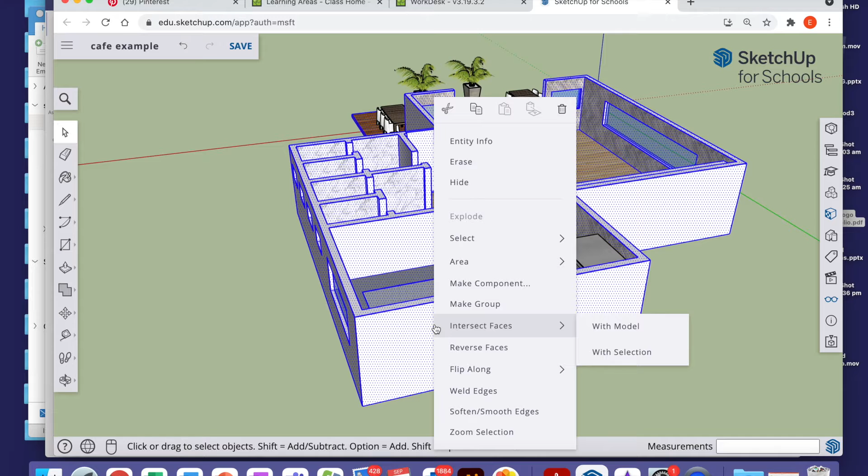Use the arrow, triple click on your model until it is all in blue. Right click, make group. This way, once we do the doors, if we happen to make a mistake, we won't affect our model. If we need to edit the model, select it, right click and explode.

And that way, while something is grouped, you can't actually adjust it. So if you're actually drawing shapes onto a shape that isn't grouped, they'll join together in SketchUp. In this case, it will remain separate.

What you can do now is actually draw a box on the floor, drag it up. This is going to be our door shape, like a 2400.

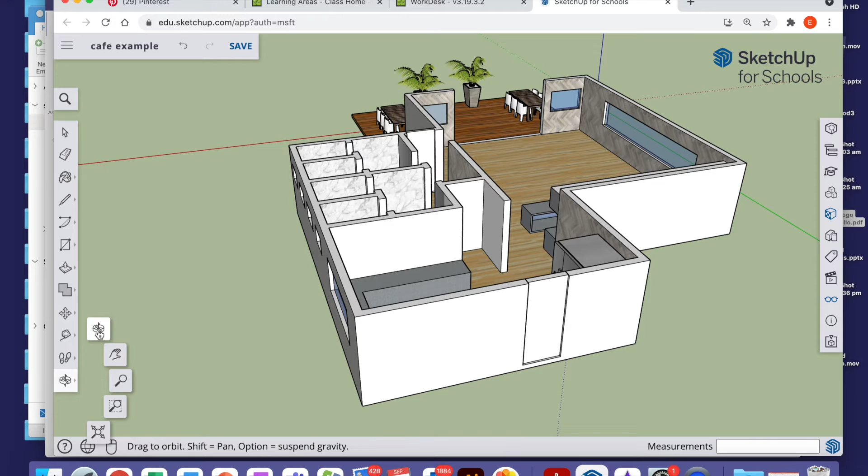I'm going to push it in about 50, rotate it around and push it in at 50 on the other side using the push-pull tool. That way it should be 100 mil thick.

We can then colour it depending on what door colour we would like. Get any colour that you like, a nice beachy blue.

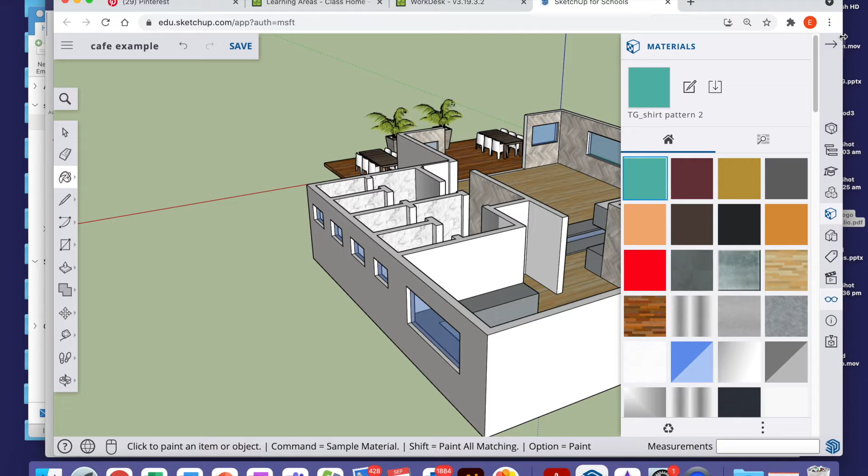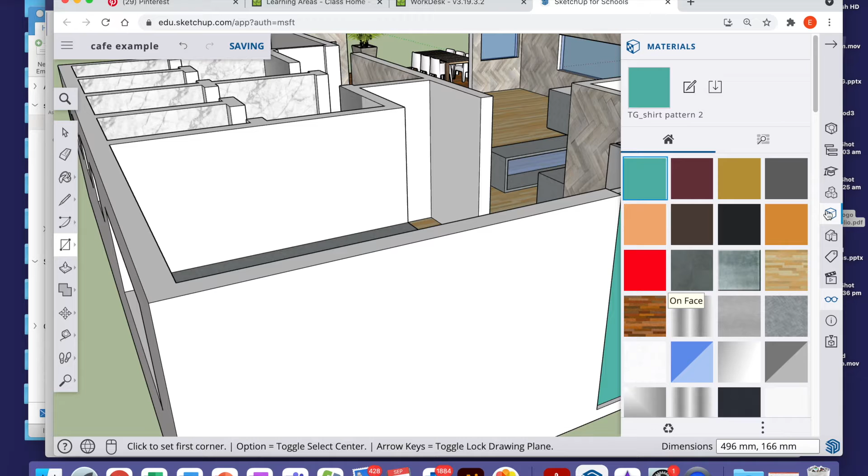You can actually draw a little rectangle. Fill it with stainless steel colour. And extrude it out of the door, and that way it will look like a nice little modern door handle.

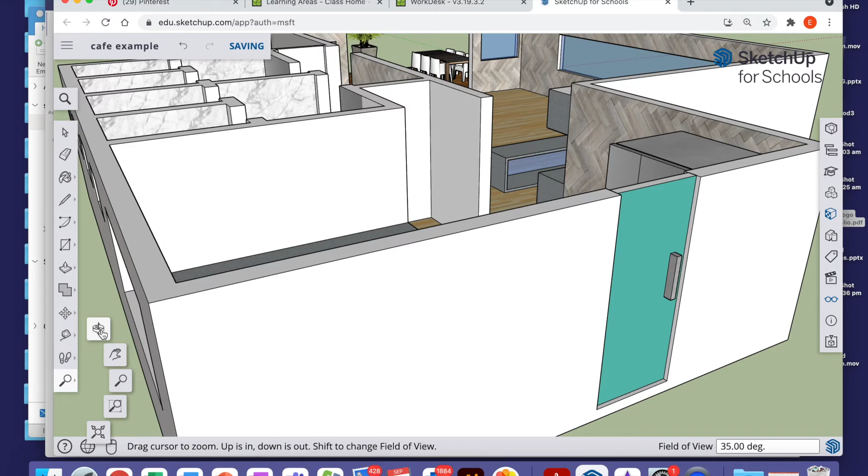If you want to add something like bifold doors, you could definitely get those from the internet, the warehouse I'm sorry. So go to the triple block.

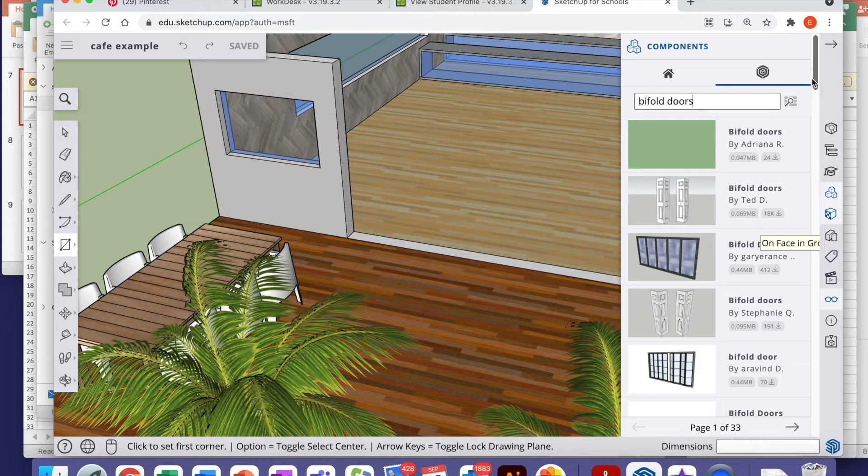And there's all sorts of bifold doors in there. So you can grab something that you think looks effective. Might grab this one here.

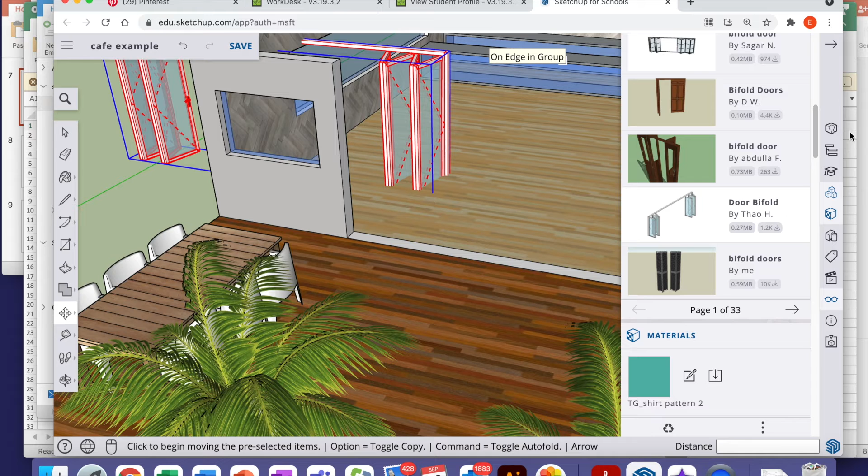Now it's quite tricky to get things from the warehouse into the right position. So the first thing I do is click on the movie theatre, make sure I'm in parallel projection, and I look straight down on my model. And I move whatever it is I'm working with into position with the cross from the top.

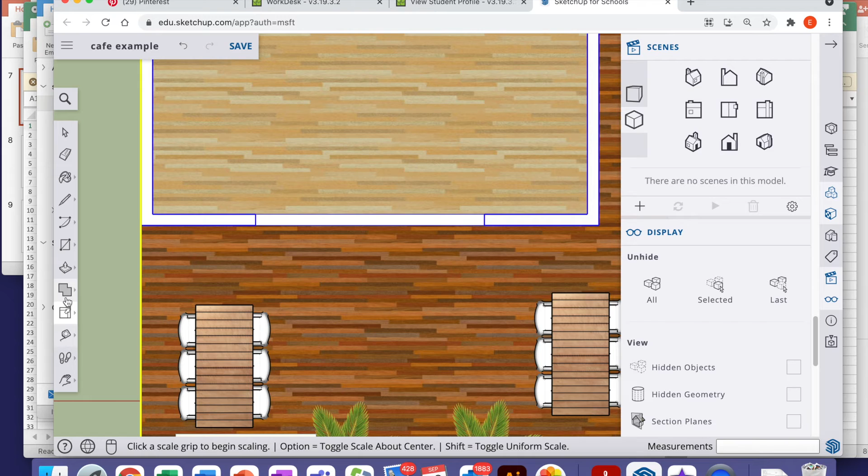You can then scale it from the top view using this tool here. So under the cross, the bottom one is the scale tool. Looks like it's disappeared. We'll go to the right hand view.

And I'm going to move that up again. So that's what's tricky about getting things from the warehouse.

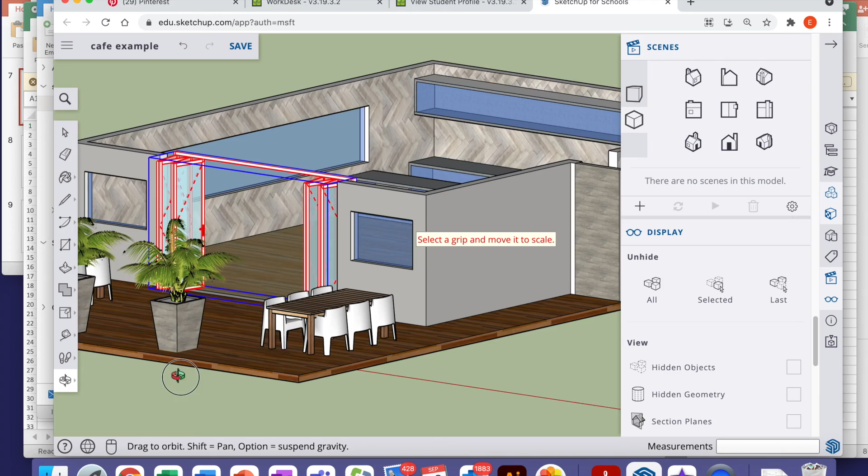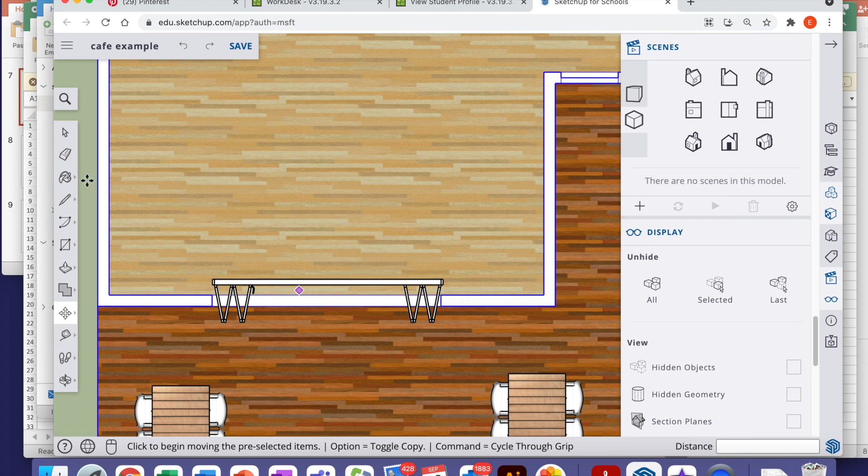That's, I think, looking pretty good. I might need to move it a little bit further forward. Oops, make sure I'm selecting the right thing. That should just about do it.

There we go, I've put my bifold doors in.